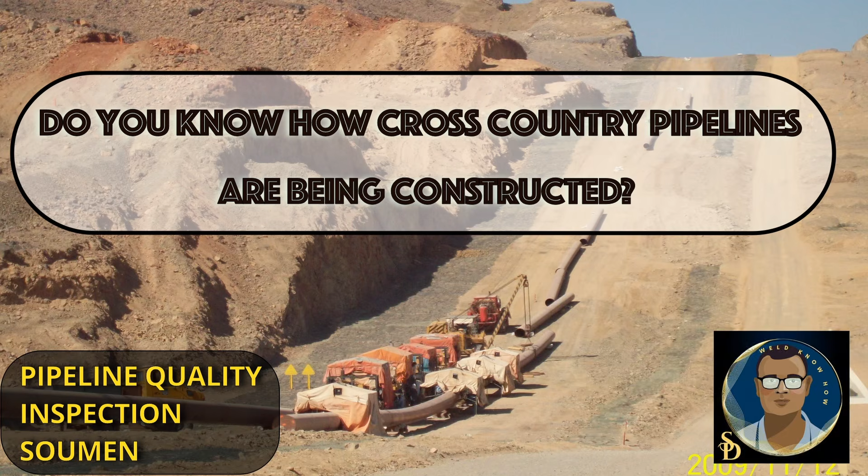Hello viewers, today we will discuss all the steps or hidden construction processes to start a pipeline project till handing over to the client. So this video might take some longer, but the information is very important, especially for those who are very new to the pipeline.

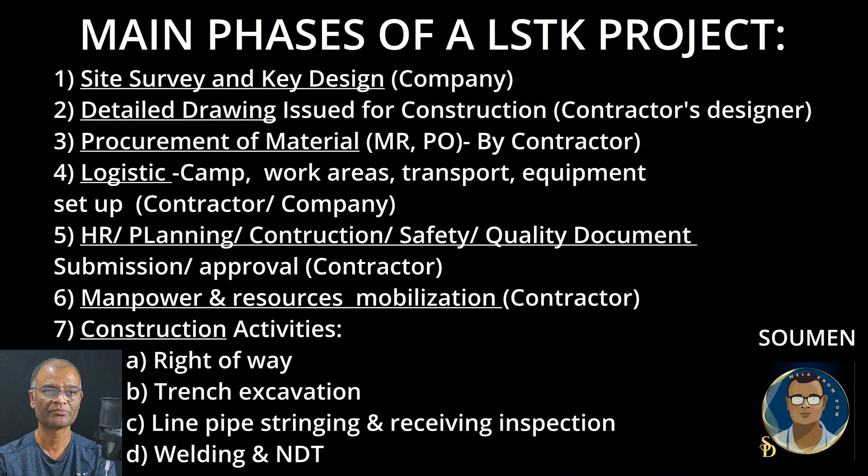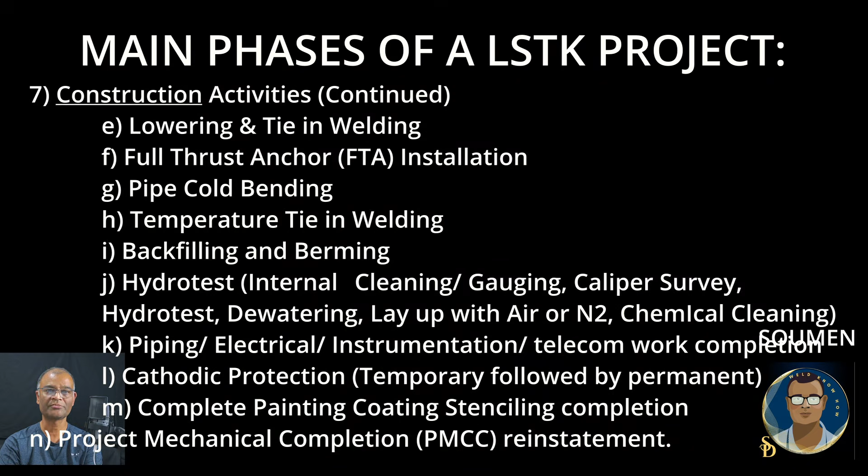Let's start. A construction project actually starts much before the site construction activity starts. So there are some activities which are not visible at site, but people are working from the client to make a preliminary survey to decide the pipeline route. That's why the design key plan is getting prepared.

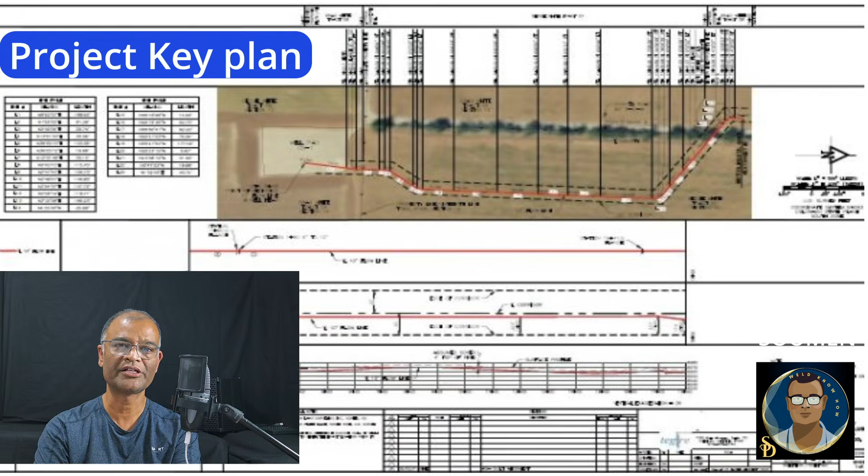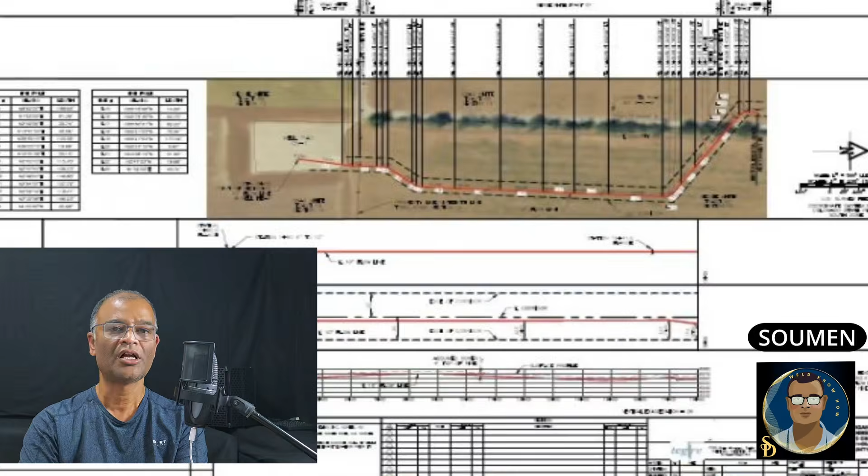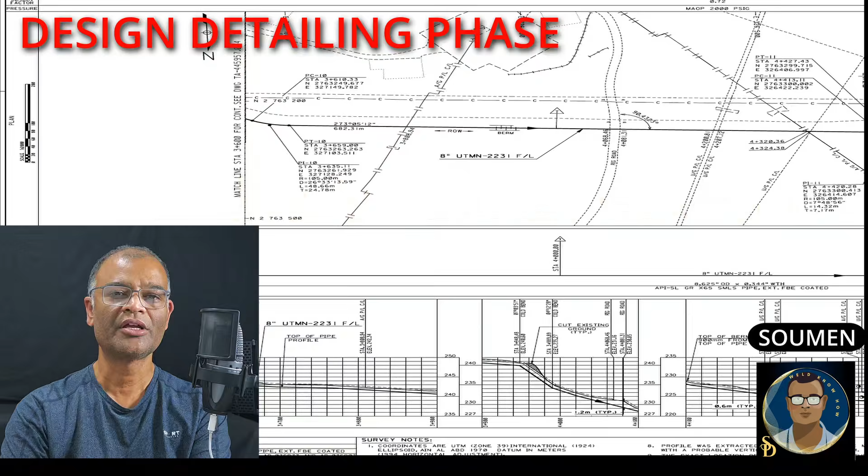LSTK means lump sum turnkey. That means the contractor who is awarded this project starts the design, then procurement, then construction and complete handover. After the project is awarded to the contractor, the company will hand over the key design to the contractor officially. The contractor will appoint a company-approved design contractor who will detail the design and provide the contractor all types of drawings required to construct the pipeline and its related facilities, piping, etc.

When the designs are under review, there are 30, 60, 90 or 100% reviews before IFC. This review will be done by the contractor engineering group as well as the company engineering team. The company will build up a team which is called the project management team. They will be at the site to manage the contractor and hand over to the owner of the project who

is the proponent. These detailed drawings will be reviewed by the contractor engineering department, the project management team, which is termed PMT, and also by the proponent, so that if they have any objection they will raise it now and the design and detailed design can be revised accordingly.

So after the design is issued IFC, the material requisition will be started by the contractor procurement department. This material requisition includes only the material the contractor needs to procure. Generally in a pipeline project, line pipes and some fittings, some spools are supplied by the company, and the remaining materials, already predefined, will be procured by the contractor procurement team. So the procurement team as well as the design and detail design guys are working inside the office to make the project ready for construction.

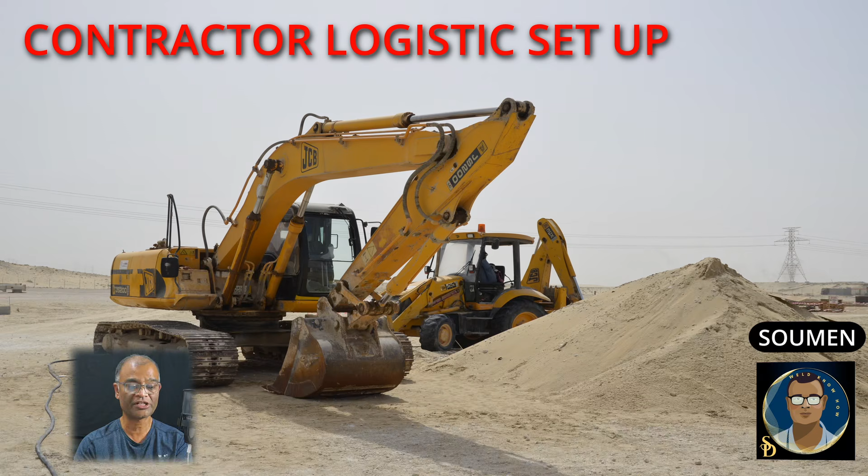In parallel, the contractor logistics department gets very busy with the following: finalize the site project office and accommodation camp. In most cases, LUP, meaning land use permit, is acquired from the client-allotted land. Mobilize the site team to the construction office and accommodation as per the approved contractor facility design and drawings. The contractor must follow company general instructions and HSE requirements while constructing their facility.

They will arrange and build construction facilities like the workshop, fabrication shop, secure the laydown yard to make it ready to preserve project material, and build warehouses to store the project materials. The logistics department will from time to time invite the contractor QC department to arrange inspection and approval from the company inspection department prior to using the newly built facilities. The logistics department arranges and mobilizes equipment, tools, and transport for the construction team.

Sometimes, if the project is near a city or village, the contractor may rent facilities to avoid huge mobilization cost, and it also saves a lot of time. They can rent the facilities and immediately start their work.

Besides this, the site management team is active with the following: HR, meaning the Human Resource Department, works tirelessly from the very beginning of the project to search for manpower and resources, and arrange salaries for the employees. They have to set up their system following the contractor HR policy. The design and procurement department is the first department to start work in the contractor's main city office. Sometimes these offices are provided by the design contractor.

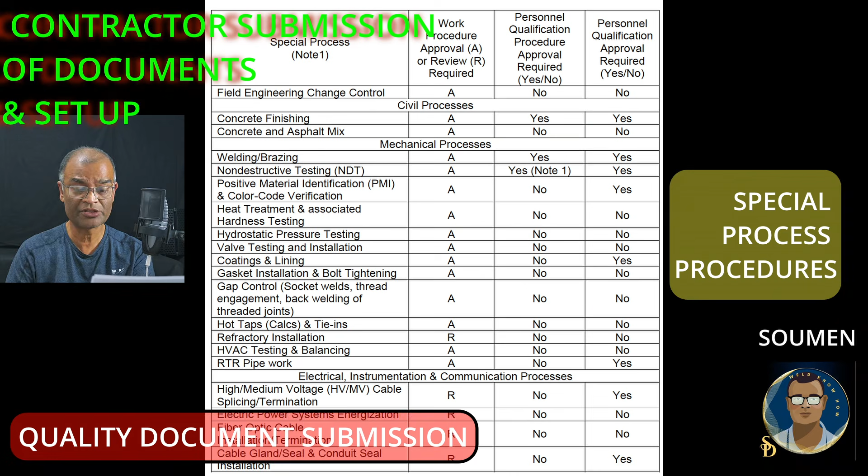The quality assurance and control manager prepares and gradually submits all project quality deliverables. For example, the project quality plan, all quality procedures, all special procedures, service provider procedures, NDT, calibration, civil testing lab, for example.

Generally, the welding engineer prepares the welding procedure qualification, which is called PWPS, meaning preliminary welding procedure, which is the basis to start the welding procedure qualification test as soon as the fabrication shop is ready. Approval of the WPS will take some time. Submission of all documents must follow the time limit from company guidelines and code or standard.

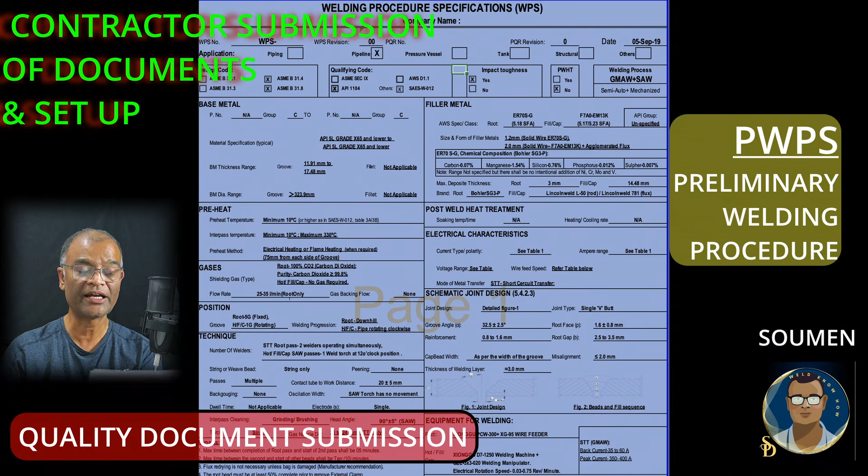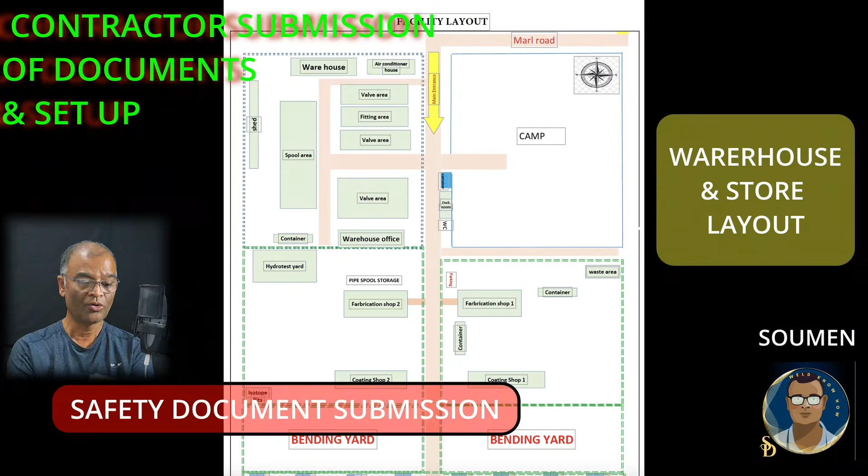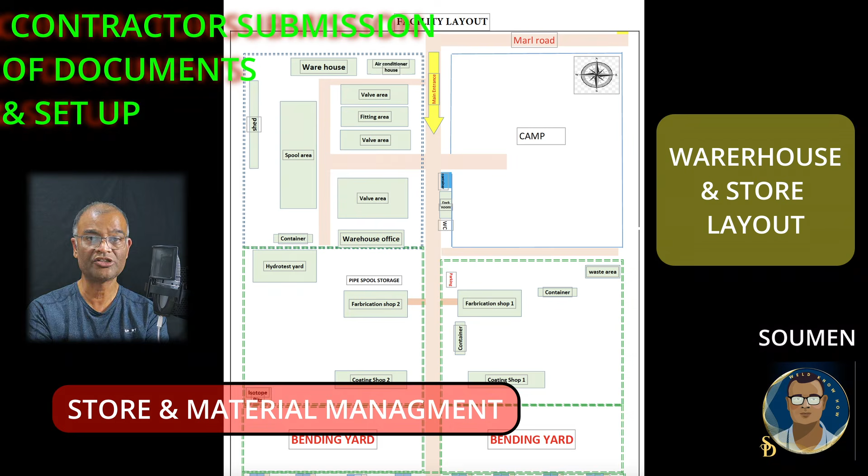Similarly, the safety department has to prepare and submit the safety manual and procedures. They have to submit the HIP, hazard identification plan. Also, they need to get the camp approved from the company loss prevention department, company safety department. They have to see the welfare and safety of the people who will be living from the contractor side in their facilities. Warehouse and store management is busy establishing their inventory control system, planning and marking the layout to make the facilities ready to accept project material, daily consumables, etc.

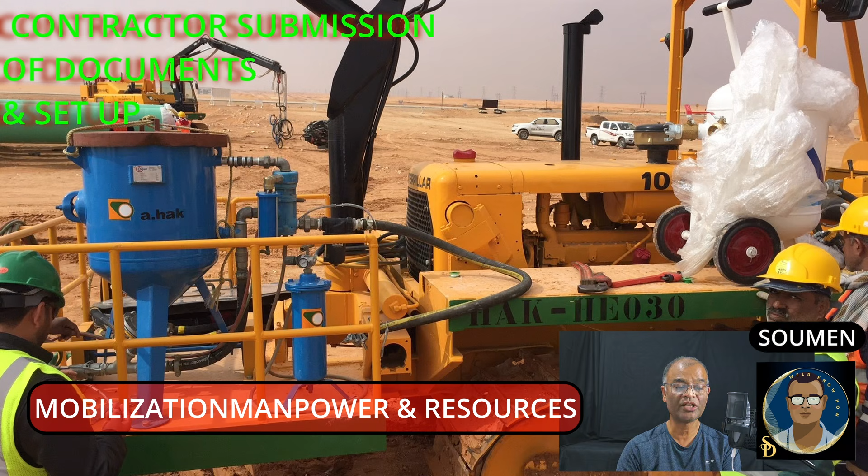Finally, the contractor starts mobilizing manpower, equipment operators, catering services, medical clinic, doctors, male nurse, laundry, etc. All construction, quality, safety and other departments gradually start to employ and mobilize engineers, inspectors, safety officers as required in the project manpower deployment schedule. Generally, pipeline construction work starts with a site survey to mark the pipeline route.

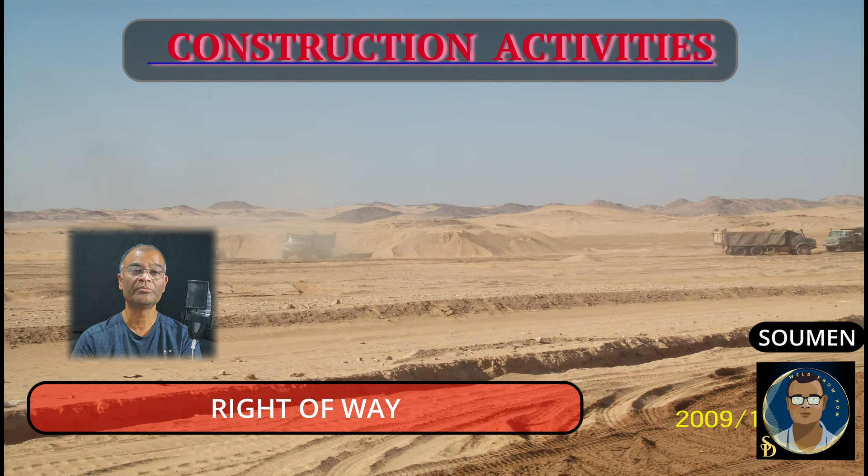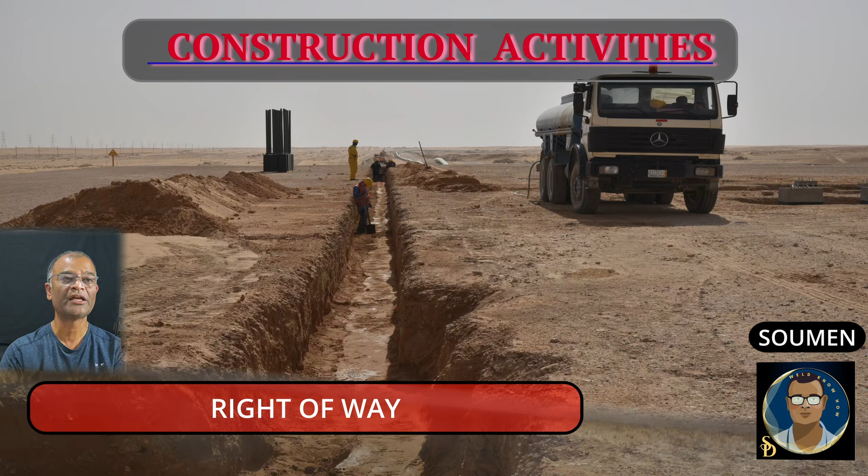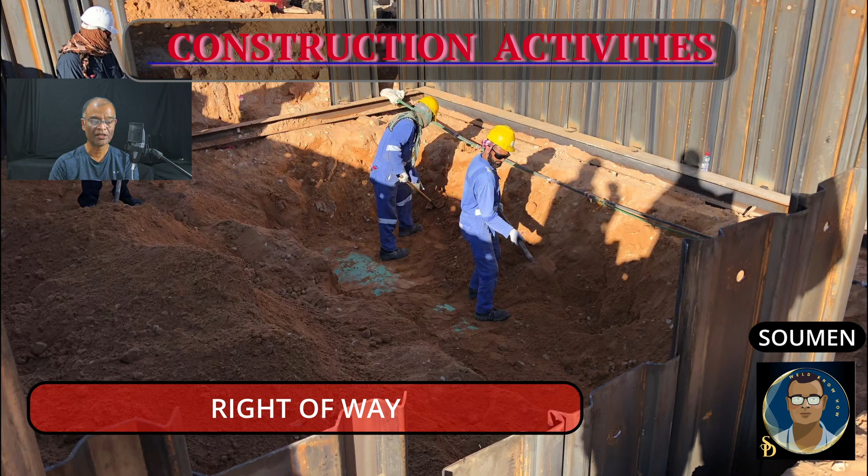The major site activities in sequence can be described as right-of-way preparation. That means the temporary marl road beside the pipeline from where the manpower and equipment access to construct the pipeline. The access road is prepared. Now the equipment comes to start trench excavation in case of underground pipeline, and in case of above ground pipeline they need to prepare and put the pipeline typical supports where the above ground pipeline will run on. Oil pad or manifold or GOSP or gas pad preparation, where the civil foundation can be started slowly.

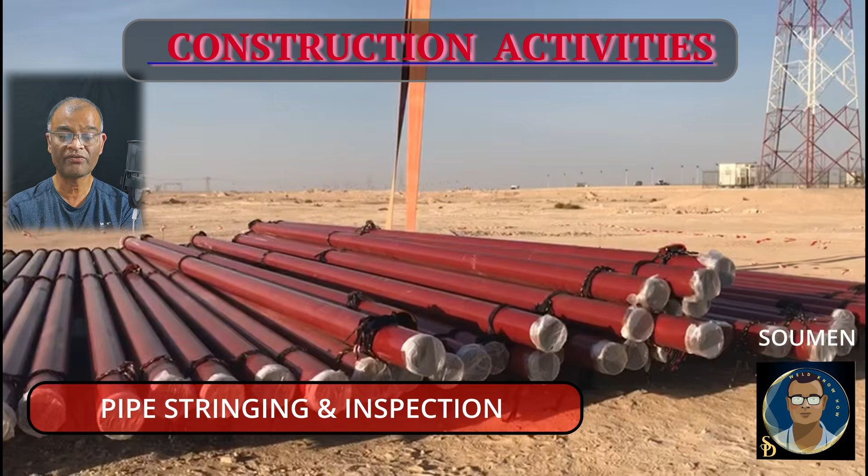The materials for pipeline, API 5L carbon steel like X60, X65, X70, are being used. Line pipe laying or stringing along the right of way is the next activity. Line pipe receiving inspection is generally done when the pipe is directly laid from the trailer to the right of way. FBE coated line pipes in case of underground pipe and bare line pipe for above ground pipeline are supplied by the company. FBE coating protection is the major responsibility of the contractor.

In parallel, in the fabrication shop, the welding procedure qualification test is ongoing. After the procedure qualification test report comes, the contractor quality department needs to submit the welding procedure for company approval. When the welding procedure is approved, then welders should be qualified accordingly. The number of welding procedures required will be decided by the welding engineer and the QA/QC manager by analyzing the types of material, their grade, their thickness. When welders are ready, their job clearance card needs to be prepared and approved by the project inspection department. Accordingly, NDT procedures are approved.

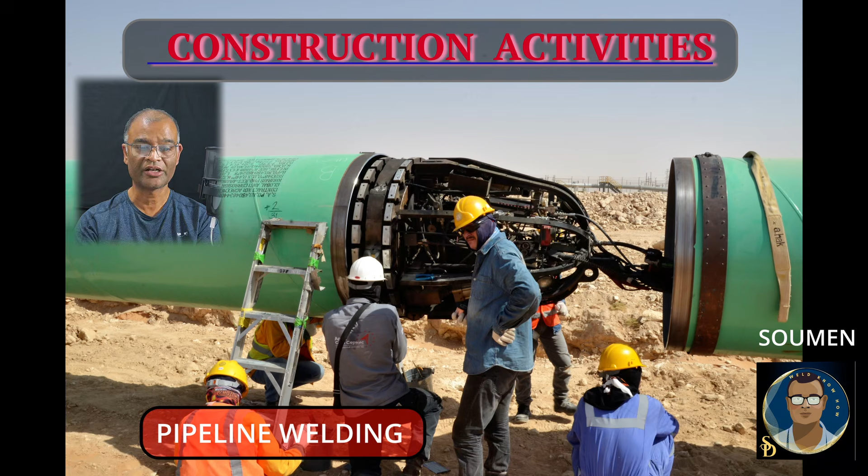So now the site is ready to start the welding. Welding cannot be started if the non-destructive testing contractor is not mobilized. If the pipeline goes through automatic welding, then the NDT procedure is automatic UT. And if it is manual welding, then the NDT required is generally radiographic test. When the NDT crew is mobilized, then the pipeline welding can be started. The first 40 welds or the first day production, whichever is more, will be facing 100% NDT, meaning radiography. In case of automatic welding, the percentage of automatic UT is always 100%. If this first lot of radiography comes satisfactory, then random radiography shall be chosen.

Another important thing, pipeline requires an internal welding clamp for the root fit-up for 16-inch and more diameter. If the contractor doesn't have this internal clamp, they can proceed with the external clamp for the root fit-up, but they have to adopt 100% NDT or radiography for all the girth welds.

Pipeline welding processes. Generally, SMAW is being used for the mainline welding. Argon root and SMAW, meaning stick welding, for the filling and capping is being done for the tie-in welding, especially if the line is internally coated, to protect the root from spatters and to get the concave shape of the root so that the internal coating for the girth weld gets adequate thickness at the root also.

MIG or MAG welding, metal inert gas welding or metal active gas welding, is generally used for automatic welding. It is also a very popular pipeline procedure where the root is STT, which is semi-automatic MIG welding, and then the filling and capping is FCAW, flux cored arc welding wires with 80-20 carbon dioxide and argon gas mixture.

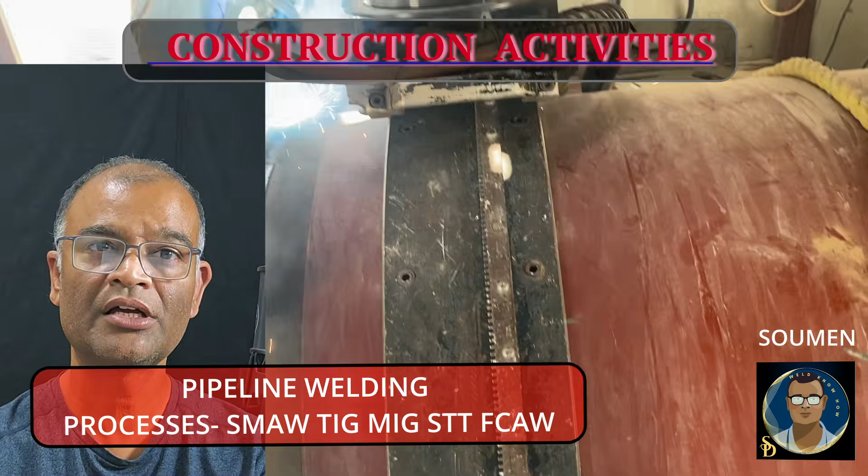Generally, this is a fully automatic process for filling and capping, and the root is STT, which is semi-automatic. Wire feed is automatic, but the welding holder manipulation is by the welder.

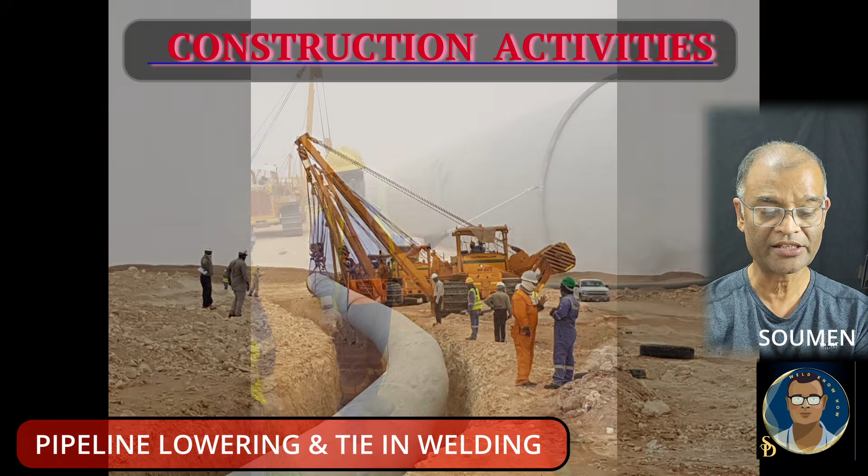For underground pipeline, when sufficient welded strings are ready, it will be lowered with the help of sufficient side booms, minimum 2 or 3, inside the pre-excavated trench. Trenches to be inspected and accepted by both contractor and company inspection.

Strings are being tied to each other by means of welding. These welds are termed as tie-in welding, which are being welded inside the trench. These are a bit difficult due to the limited space around the joint, especially for the big bore pipes. So the welded strings are now connected together inside the trench in case of underground pipeline.

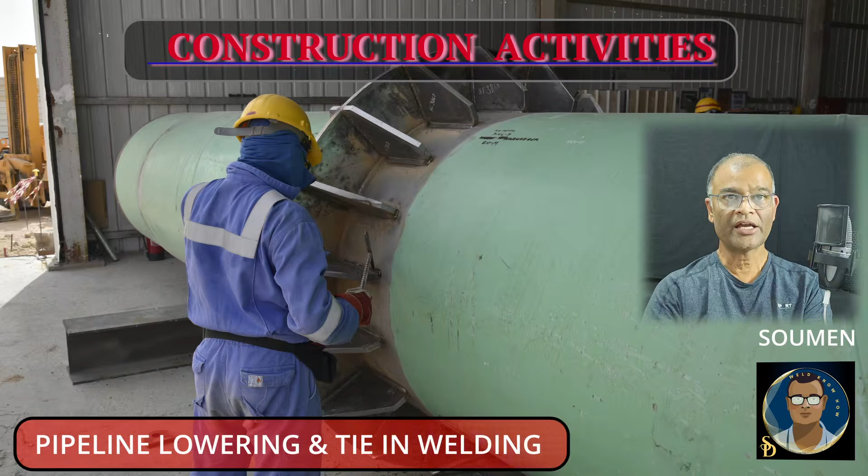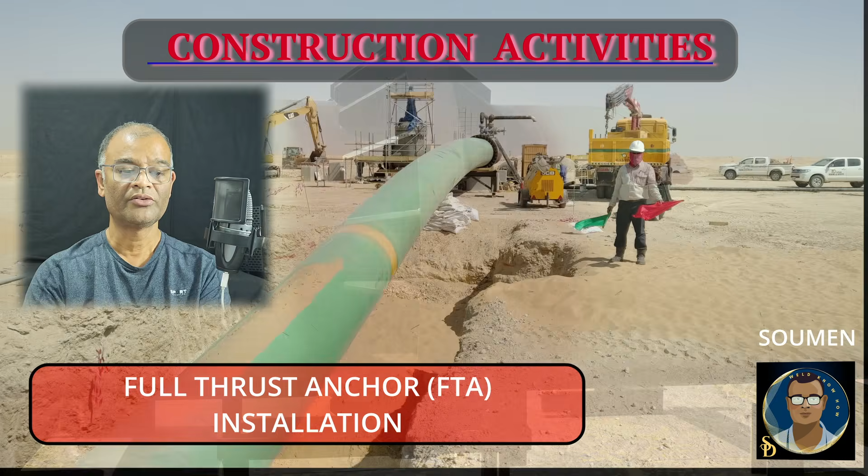At both ends of the pipe, to prevent the pipe deflection transferred to the piping at the end, there are huge concrete solid blocks cast around the pipeline at both ends, underground in case of buried pipeline, just before the pipeline enters facilities to connect with the piping system. These are termed as full thrust anchor. This is the time to install the full thrust anchor.

As the name suggests, size and volume of the concrete are designed to resist the thrust that is exerted by the long pipeline heat expansion or shrinkage or uneven flow of the service gas or oil. Full thrust anchor is protecting the facility piping system which is connected to the pipeline by arresting pipeline expansion or shrinkage. Otherwise, it could break the piping system. There are also removable structural steel anchors found for comparatively small lines and above ground pipelines.

For above ground pipelines with oil and crude oil service installed over steel supports which are based on TPS, means typical pipe concrete bases, thermal expansion or shrinkage are being compensated by expansion loops, 90-degree L or C loops. Since long radius elbows installed in these types of lines are not scrapable, means for maintenance a scraper cannot be passed through these lines. For underground lines, there are 5D or 8D long radius bends installed to avoid sharp turns to facilitate easy scraper run.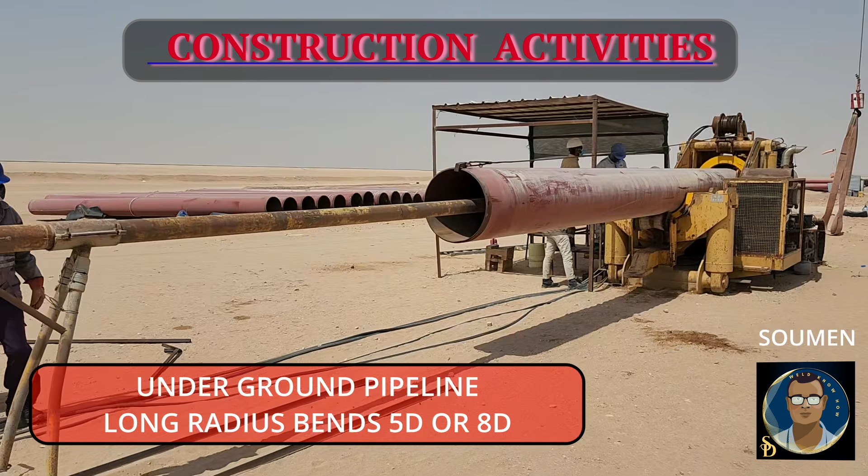Pipe bending. Pipe bends are required when there is a noticeable direction change of the pipeline, which are termed as horizontal curves. Also, when there is remarkable elevation difference, climbing or going down from hilly terrain, we need over and sag bends. For underground pipeline, at both ends where the pipeline is transiting from underground to above ground risers, we need also pipe bends. There are basically two types of bends used in the pipeline: hot bend and cold bend.

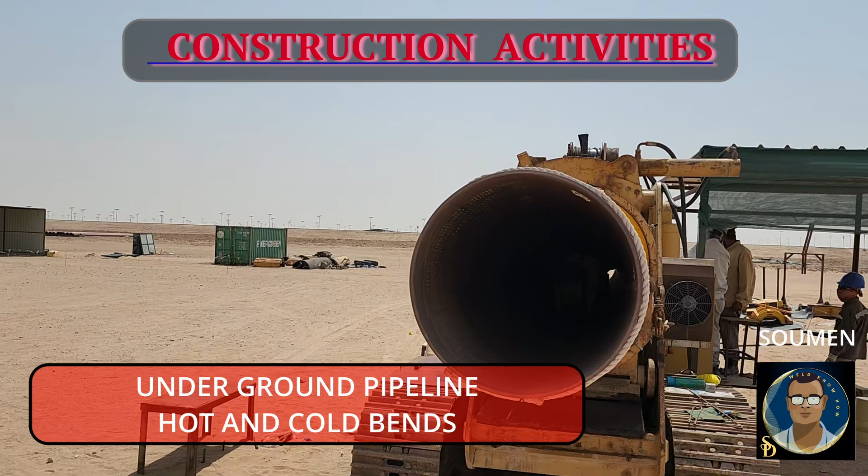Contractors are only allowed to make cold preformed bends at site with the help of a bending machine. Hot bends are only permitted to be manufactured at a company approved vendor facility. Hot bends are preferred where steeper long radius bends are required due to space constraint. Risers of flow line. This is an example.

Another activity in the pipeline is temperature tie-in weld. Generally, one string of the pipeline is 1 kilometer to 1.2 kilometer. So these strings are connected together with tie-in welds.

When the full pipeline is lowered, welded completely and backfilled for underground pipeline, and installed over steel supports in case of above ground pipelines, there will be one or more final welds where both ends are adequately anchored by the longer backfill section, or full thrust anchor at the other end, where the slack of the pipeline open strings cannot be transferred or moved to the other end. These tie-in welds are termed as temperature tie-in welds.

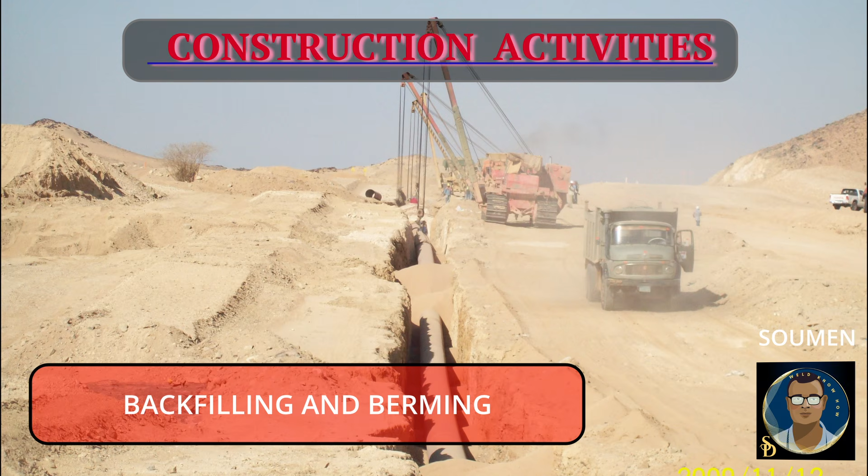Backfilling and berming. In parallel to welding, string lowering and tie-in welding, lowered portions are getting backfilled with 300 mm sweet sand without any rock or stones, followed by the marl cap layers. The total marl cover shall be minimum 900 mm from the top of the pipe. A trapezium shaped berm is to be prepared with gentle compaction manually.

Previously, crude oil was sprinkled over the finished berm as a stabilizer, which protects the berm marl from being blown away by the wind. But nowadays, due to safety hazard for the camels, only water stabilization is permitted. Now the line is welded, backfilled, and flange to flange is continuous. Now the next activity is the hydrotest, which is the final acceptance of the integrity of the pipeline.

We need to make sure that all the required welding has been done, all NDT successfully done and accepted by company representative, hydrotest package to be prepared and approval to be taken from company. Prior to commence hydrotest related activities, there are few sub activities involved in the hydrotesting.

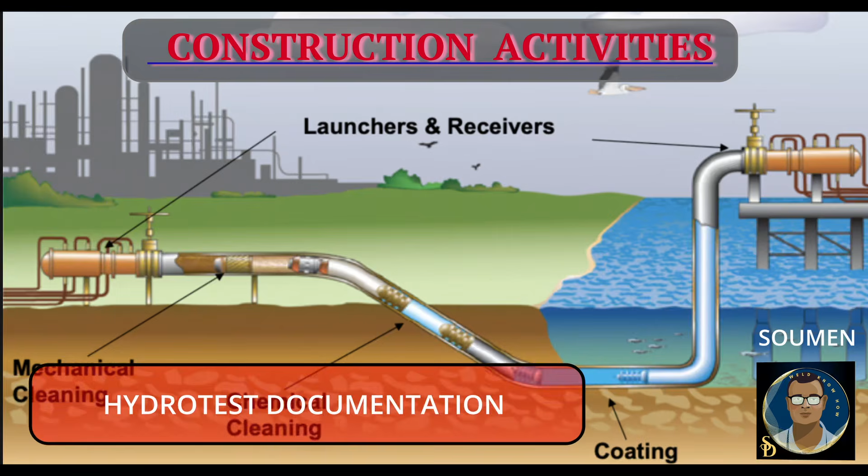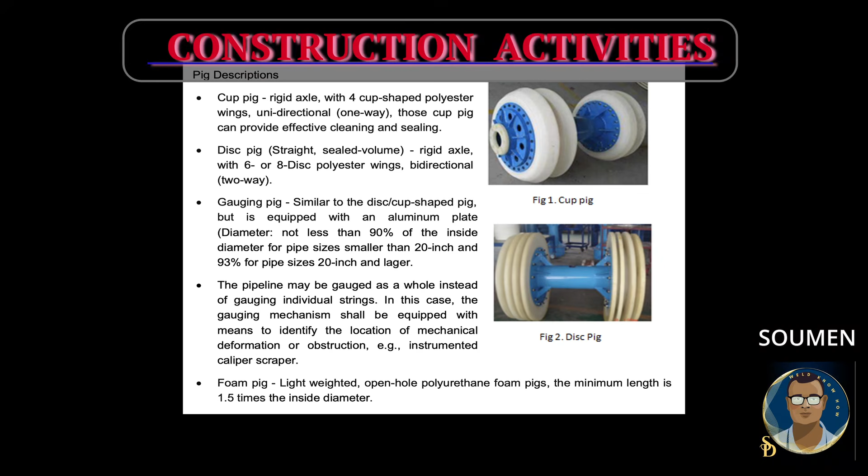So immediately after the line is completed from flange to flange, we have to prepare for pipeline internal cleaning to make sure that there is no foreign material inside, no sand, no mill scale. If it is internally coated line, hard scraper cannot be put inside the line. It will be only foam scraper and generally run with water to clean.

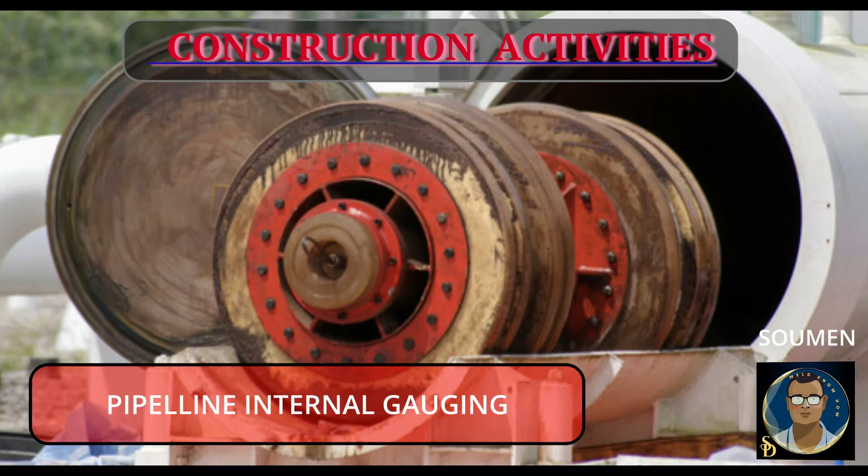Internal gauging also done for the bare pipeline, I mean internally not coated, to check the pipe diameter is not deviating than the tolerance anywhere. One aluminum gauging plate is put with the scraper, which is 90 to 93% of the internal diameter of the pipeline. If there is any damage of this gauging plate when it came out from the line, then the damage is being measured. If it is beyond limit or the tolerance, then the investigation must be done to find out any dent or any external damage from the pipeline.

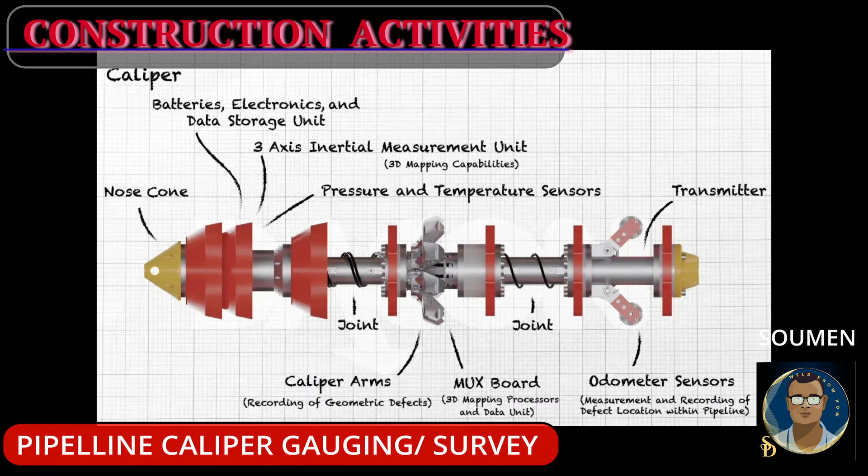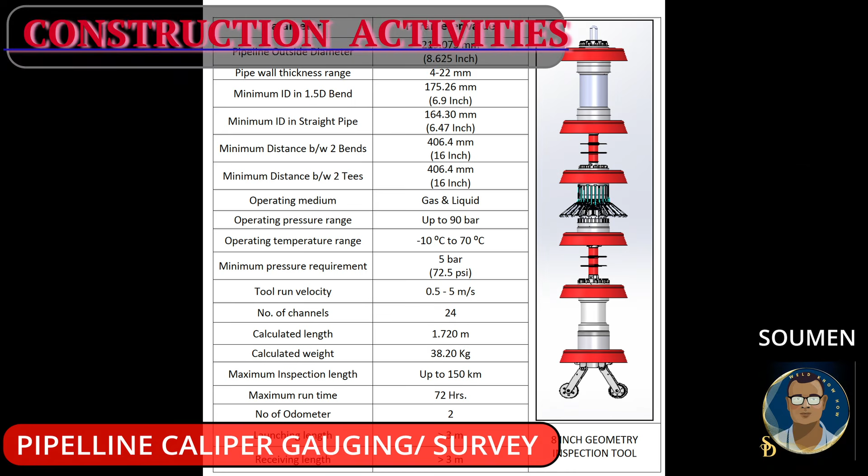For the bigger trunk line or production lines, there is a more accurate method being implemented to measure the internal diameter of the pipeline to verify any dents or damage, called caliper gauging. It is an intelligent digital tool which is installed with an intelligent scraper giving a graphical representation of the internal wall of the whole pipeline. This accurately verifies the internal diameter of the pipeline. Caliper survey. One report I am attaching for you as a sample and your better understanding.

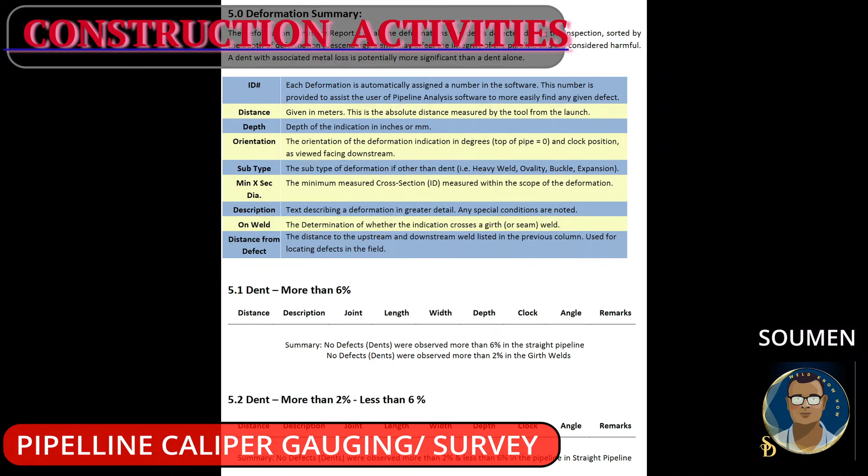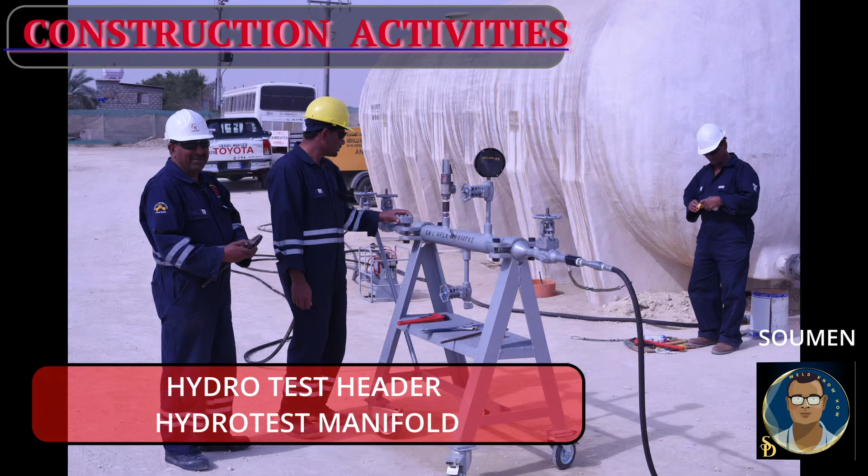Next activity is bolt torquing after installing test header or test manifolds. So manifolds are kind of safety attachments. If there is any pressure leakage, there will be pressure relief valve in the hydrotest manifold.

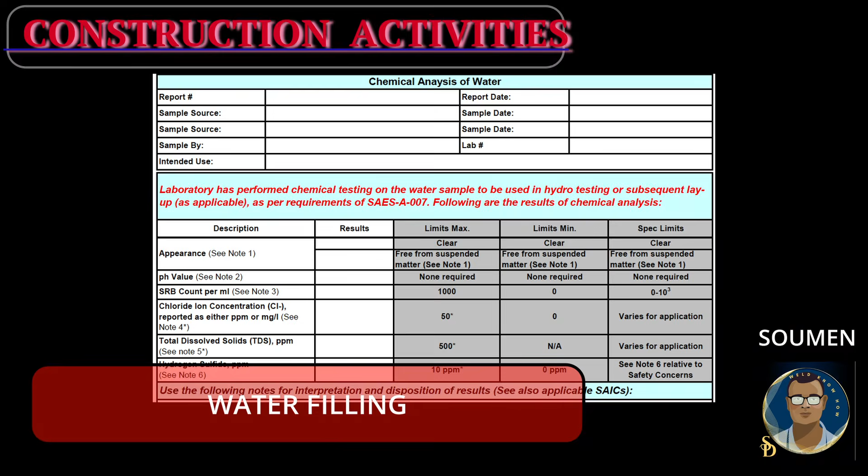Next activity is water filling. The water to be induced in the pipeline has to be tested for its quality to check it will not corrode the pipeline from inside, the chemical content in the water not react with the pipeline adversely. Sometimes if it is a big line, filling, hydrotesting and dewatering will take longer time, more than 14-15 days or more than 30 days. Then some chemical called oxygen scavenger need to be added to protect the line. The oxygen scavenger calculations are being provided by contractor.

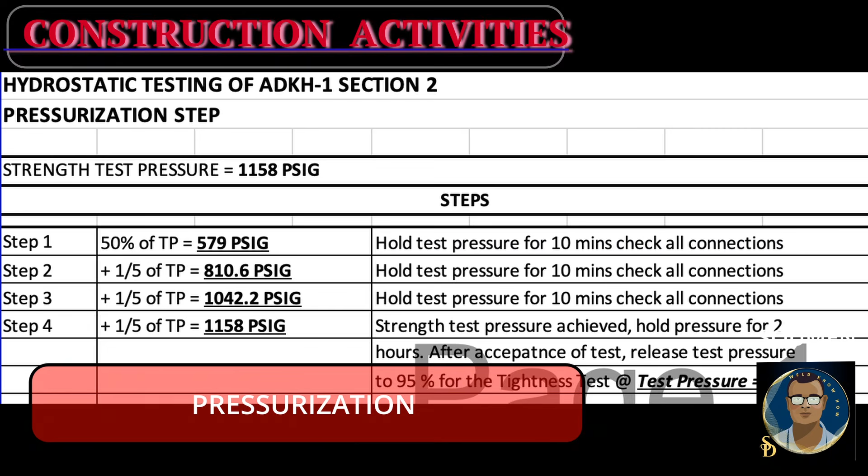When the water is filled, we have to wait for the stabilization of the water and pressurization to be started gradually. There should be some steps to be followed for raising the pressure, 50% pressure, then gradually 20% will increase till we reach to the strength test. For pipeline, there is a thumb rule to test the line at a pressure of 90% of specified minimum yield strength, SMYS. And this is much higher than the MAOP, maximum allowable operating pressure of the line.

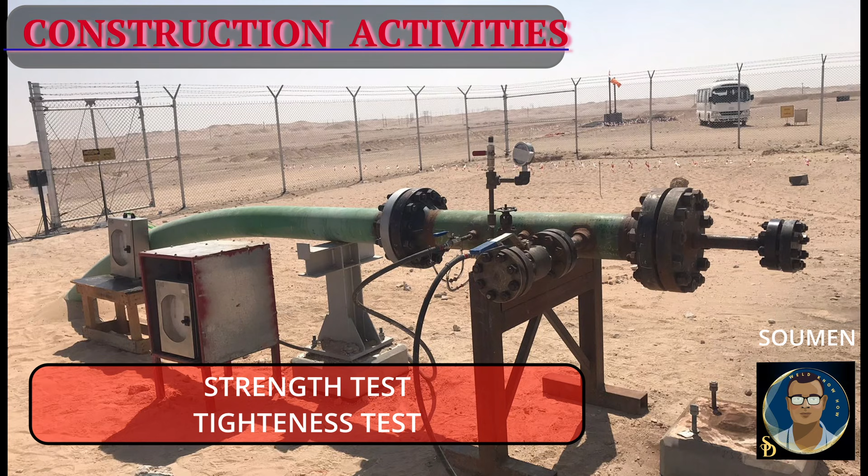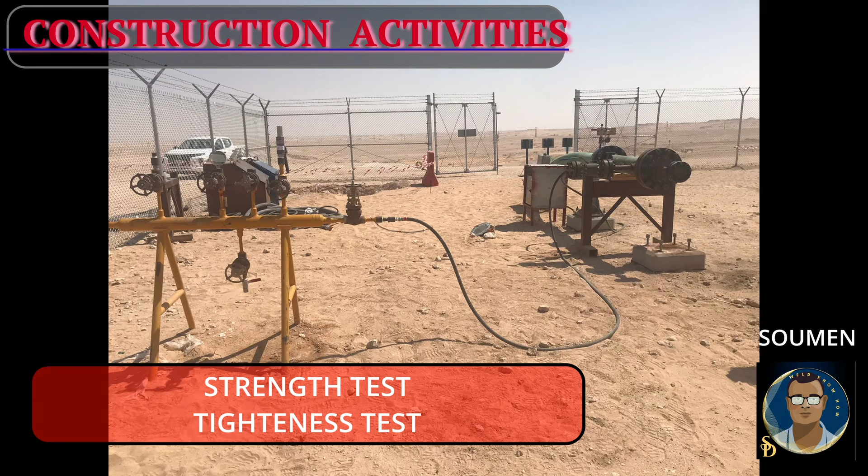So when we reach to the strength test pressure, which we will be keeping for 2 hours, the line is being checked for any leakage during this holding time. If it performs well, the strength test pressure is reduced by 5% to reach the tightness test pressure. This tightness test pressure will be further running 24 hours. Since the line is underground, we cannot inspect the line for leakage. That's why this 24-hour tightness test is required.

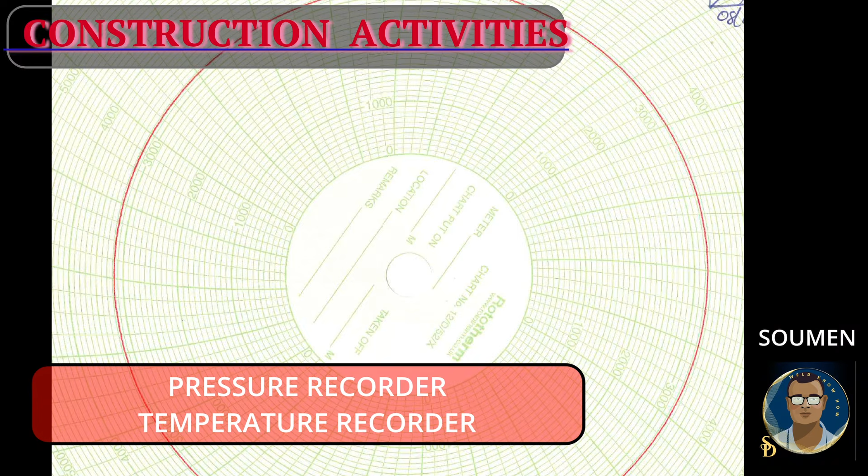All these test pressures, from pressurization start to the end, are being recorded by a pressure recorder chart, at least 2 to 3 pressure gauges, and there will be relief valves at both sides. And sometimes as an additional safety measure, in case the pressure recorder malfunctions, with a dead weight tester the pressure is also manually monitored time to time.

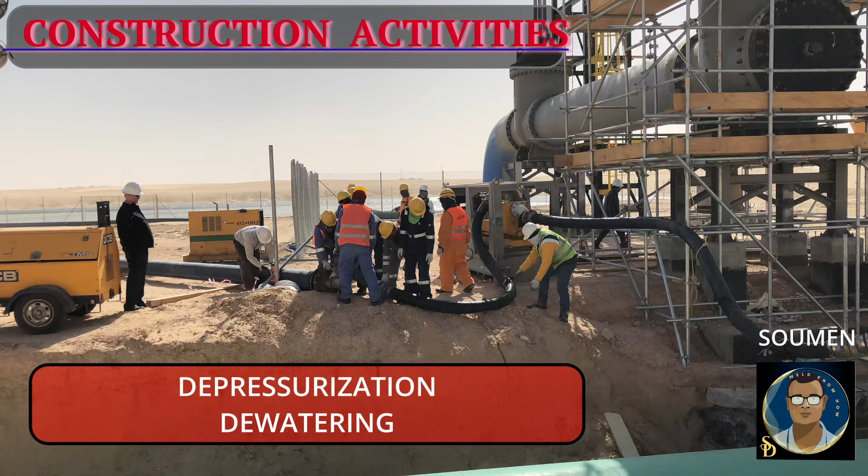After the successful acceptance of the hydrotest, project inspector from company and the contractor quality inspector review the pressure chart and sign there. Then the depressurization is started, followed by dewatering and then swabbing and drying. Line has been dried for several days in case of big lines.

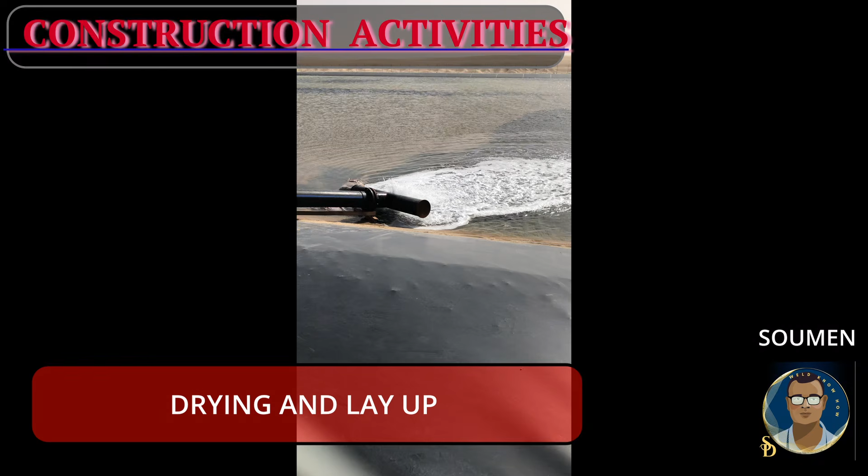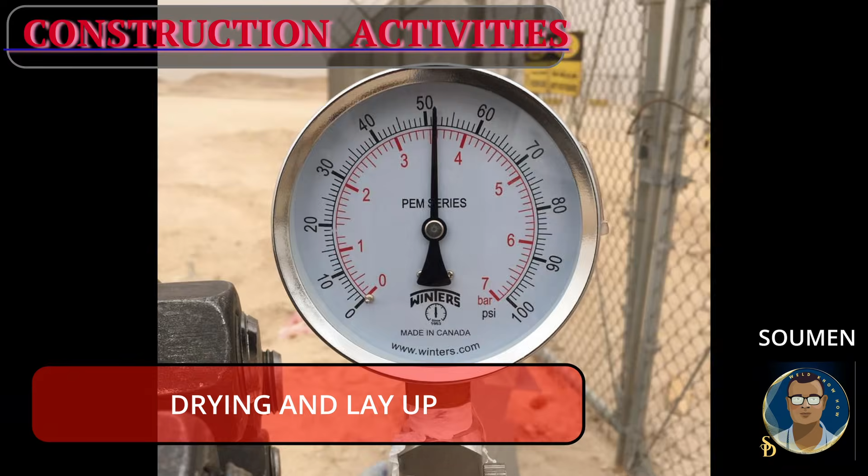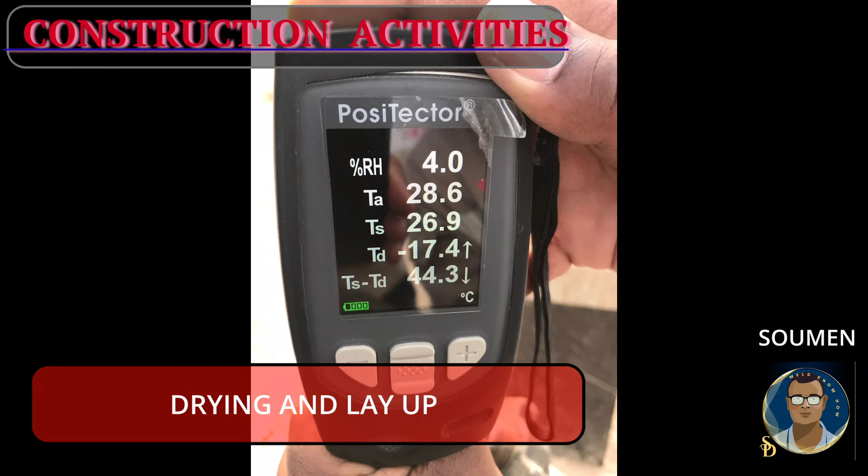With the dry air, -1 degree centigrade of dew point achieved, the contractor needs to push nitrogen from one end, and generally this nitrogen gives a very good result for dew point. It can reach up to -30 to -40 degree centigrade, and a positive 30 to 50 psi pressure of nitrogen is being maintained in this closed system to protect it from corrosion till the pipeline goes into service.

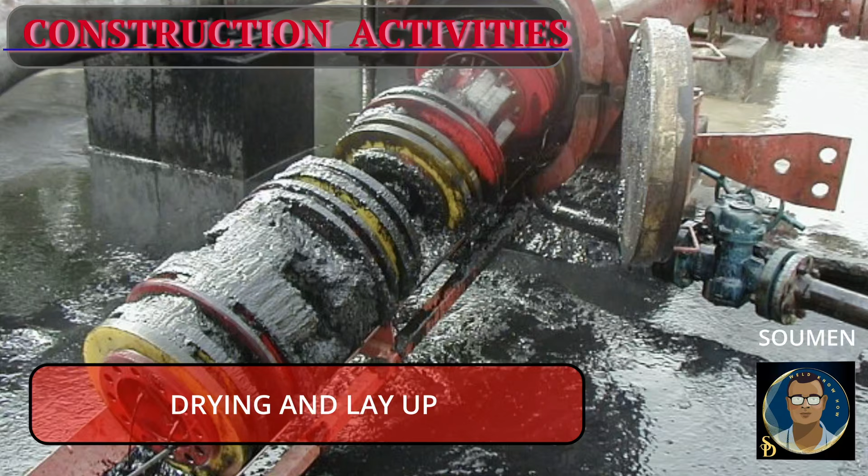Now the pipeline being accepted, there are few more activities in the pipeline. Chemical cleaning. This process is required for the refined product pipelines so that the line will leave no rust or mill scale inside the pipeline prior to introducing finished service products like kerosene, diesel for transportation.

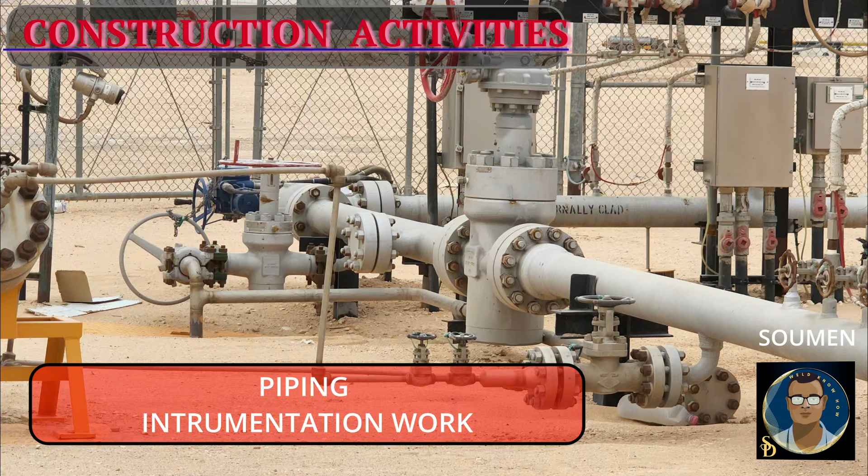Piping and valve and instrument installation. This is also being done in parallel with the pipeline construction or after the pipeline has been completed. At both ends of the pipeline, there can be a remote manifold, scraper trap and utility facility which can be inside or outside of a secured facility plant area.

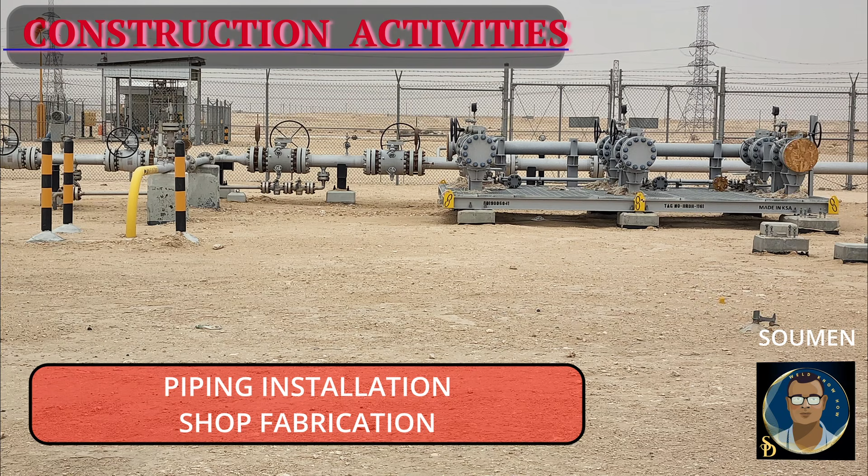Shop fabrication, installation of piping, valves, instruments like pressure gauge, pressure and temperature transmitter, scraper passage indicators, LDS means leak detection system, to be completed in parallel with pipeline construction work. We can discuss about the piping works in another video later on.

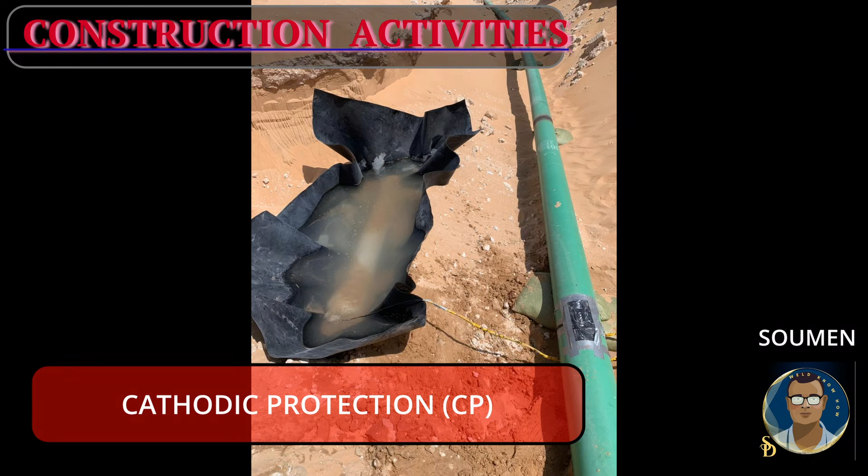Cathodic protection, an additional protection for the underground pipeline to increase their service life to a greater extent. For example, if there is no cathodic protection, the service life of a pipeline may be 10 years. But if you put cathodic protection, the life can be extended up to 25 years. This is a figure I am giving you only to understand the utility of cathodic protection.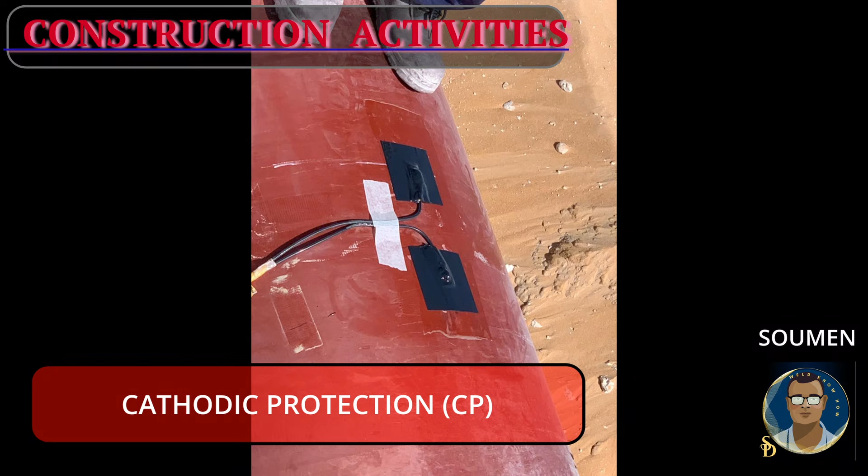Cathodic protection: a small amount of impressed current flowing through the pipeline which is giving cathodic effect. It is degrading the anode installed in the line, leaving the pipeline free of corrosion or rust. CP cables to be connected through thermite welding on the pipeline in every crossing and the areas recommended in the drawings. Temporary CP, that is magnesium anodes, to be installed place to place, which will protect the line till permanent CP is installed and during the construction phase.

Mechanical, electrical, instrumentation and telecommunication completion. Based on the project scope, electrical and telecommunication cable laying, backfilling, termination, equipment like scraper trap, jib cranes, scraper handling facility, pressure gauge, pressure transmitter, temperature transmitter, thermowells, RTU, junction boxes, switch racks, SCADA, CP rectifiers, leak detection systems to be installed over the pipeline based on the scope of the project. All these instruments and equipment need to be tested to prove their functionality.

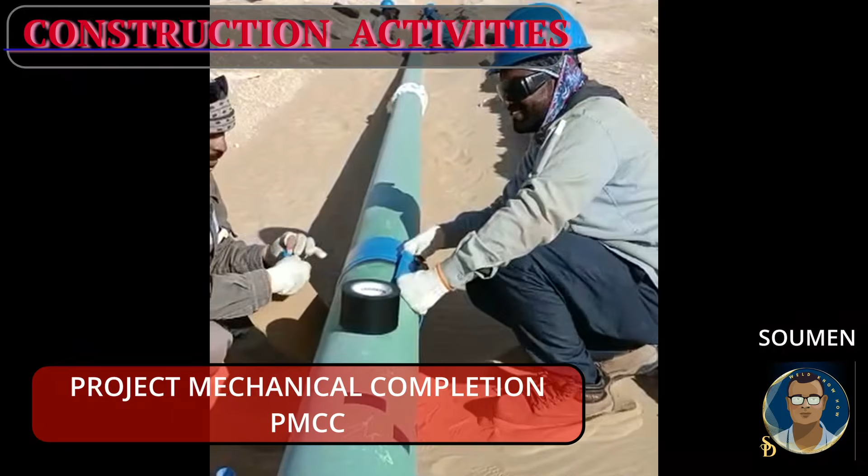E&I means electrical and instrumentation; telecom system to be connected with the company terminals. Motor operated valve, hydraulic operated valve, MOV, HOV, pressure control valve, PCV to be connected to the RTU or hydraulic system as required.

Painting coating items completion. This is another department. During all the construction stages, coating and wrapping of the pipeline girth welds, metallic coating of the above ground pipeline, stenciling of the line, equipment identification numbers are ongoing. There are usually many no PMCC items related to paint touch-up, stenciling which are being closed at the final stages of the project.

Pipeline completion. After successful completion of the pipeline, a final walkthrough with company and contractor representative team to find the remaining work for safety and quality is organized. The outcome is a bunch of remaining items which are termed as PMCC, Project Mechanical Completion Certificate items. PMCC items: there are yes and no items. Yes items are the items required to commission the line. When done, MCC is issued to the company.

So PMCC is the remaining work, which can be small or big, but remaining work. For complete handover of the project, either LSTK or LSPB, the contractor must close all PMCC items, which can be yes or no. If some items in the PMCC can be proven as beyond the work scope of the contractor, it is the sole responsibility of the company to decide to award it to the same contractor as a change of scope order or give this additional scope to others.

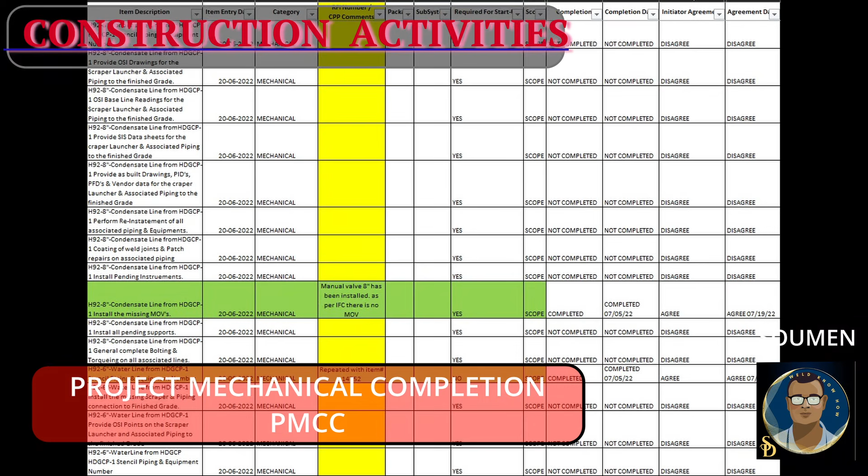Upon completion of PMCC, the contractor needs to remove their facility, camp or office, demolish and reinstate the company provided area to claim the retention money held by the company. The company may issue an appreciation and successful completion certificate to the contractor based on their satisfaction.

So viewers, today I think I have explained a brief process overview of pipeline construction. If you still have any questions, we can discuss further.